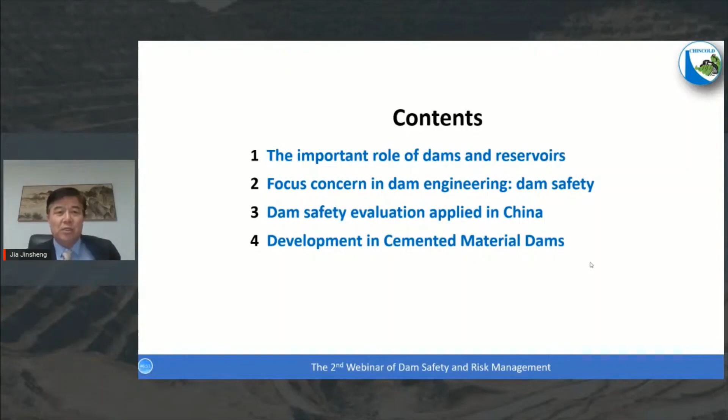So here I would like to go through very quickly 4 topics. One is the important role of dams and reservoirs. There are so many papers, but we still need to remember the important role of dams and reservoirs. Second, we focus on dam safety - what's the main task for the future? Third, I would like to introduce concrete dam safety evaluation in China, what we have done. And last, I would like to introduce the development in cemented material dams.

So this world is developing very quickly. The population growth and the socio-economic development give us very high requirements on water security, food and energy security, and ecological security. So the situation is very challenging for the developing countries.

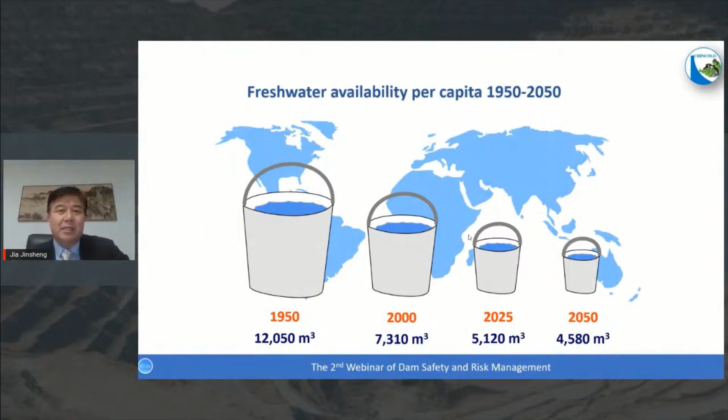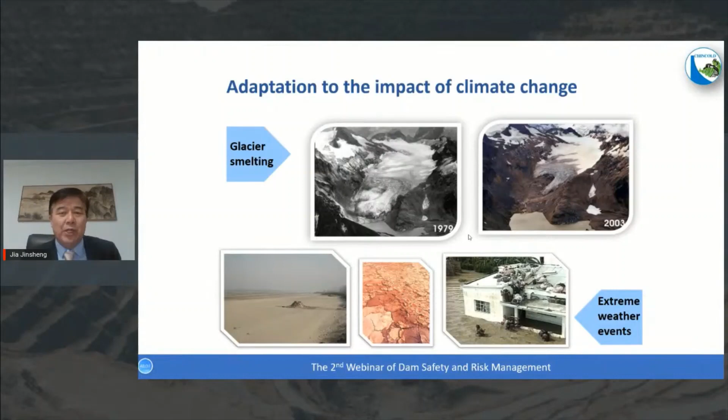So one is the fresh water availability per capita is less and less, especially for some special areas in the world. And also some areas suffering the water stress, hazards, and droughts. So glacier melting and extreme weather events, floods and droughts. All of this, we need more reservoirs, more dams to do the regulation of natural water.

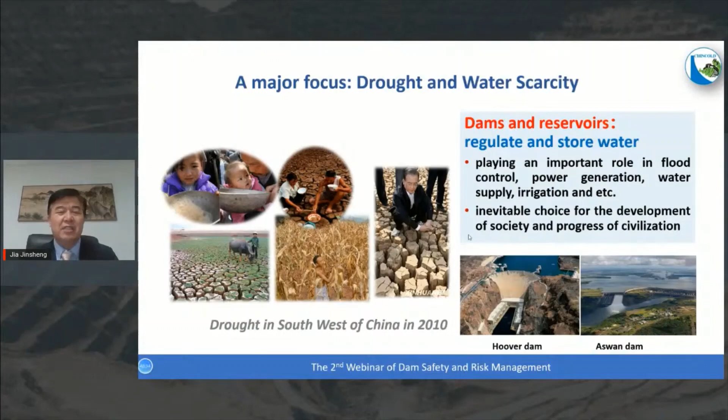So this is some photos in China. So in China, also we suffer droughts and floods. So even though we have the most dams in the world, we have so many dams everywhere, but we still need new dams, new reservoirs in the future.

And also we have made the calculation, with the storage capacity per capita, compared with the HDI - Human Development Index. And also we investigate on the hydropower capacity, making a similar calculation with the relationship to the HDI. So we found that the developing country, for example China, also needs to work very hard to create water storage, to create hydropower development. So that's the basic conclusion.

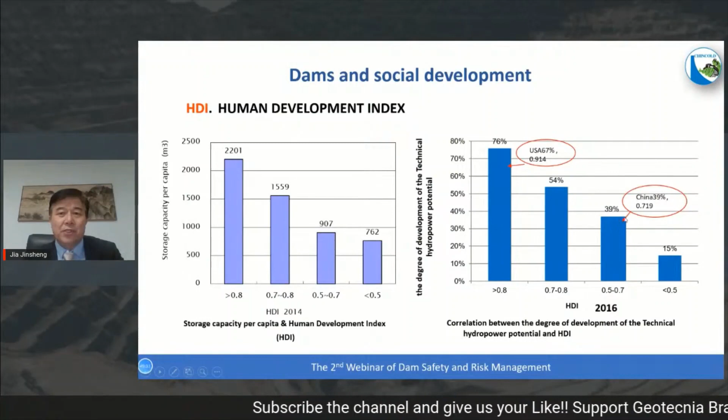For China, we are a developing country, even though we have the largest number in the world of reservoirs and dams. So we issued the World Declaration in the year 2012 for water storage for sustainable development. We just highlight the sustainable development of dams and reservoirs and other water storage facilities. So these are the strategic importance for developed countries and also for developing countries.

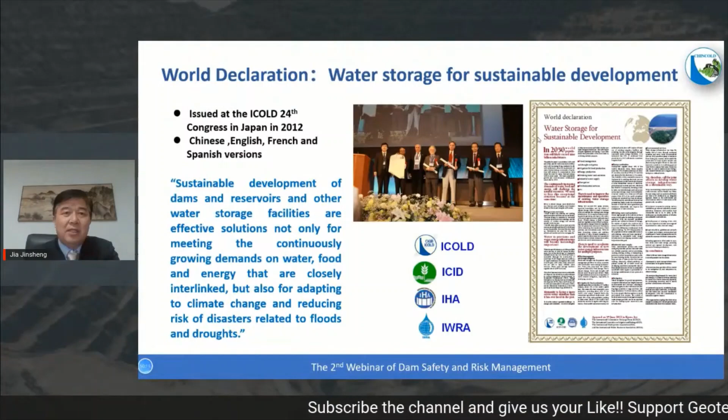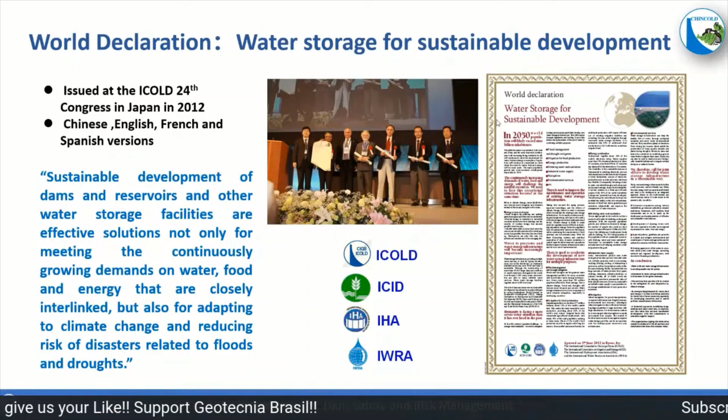So in developing countries, usually we have to fight with disasters, flood disasters, and fight with drought disasters. But if we have reliable and enough water storage facilities, we will welcome the floods, because that means resources. So the basic idea is that we should construct more water storage infrastructure, and also increase the reliability of dam safety.

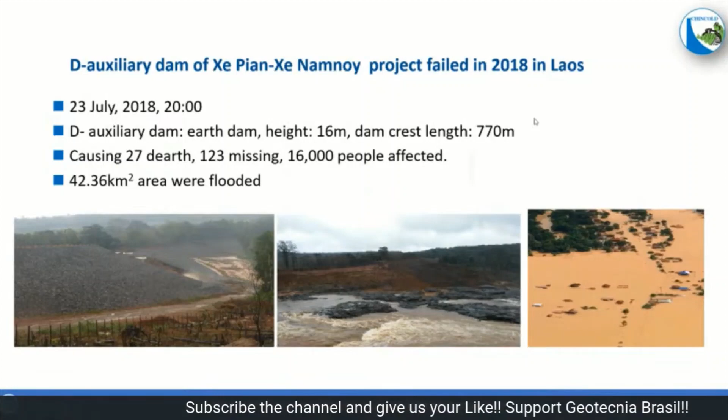And in China, each year we have dam failure cases, and also dike failure cases during the flood season. So each year, the governments pay much more attention to fighting against floods. So that means the water storage facility is not enough and not so reliable. So we should go forward in this direction.

So our president, our esteemed president, Mr. Rogers, has done very good, excellent jobs. He issued the dam safety world declaration. We fully agree on the core parts of these declarations. So we think it's very, very important - better dams for better world. But first, we should have safe dams to guarantee the safety of the people downstream.

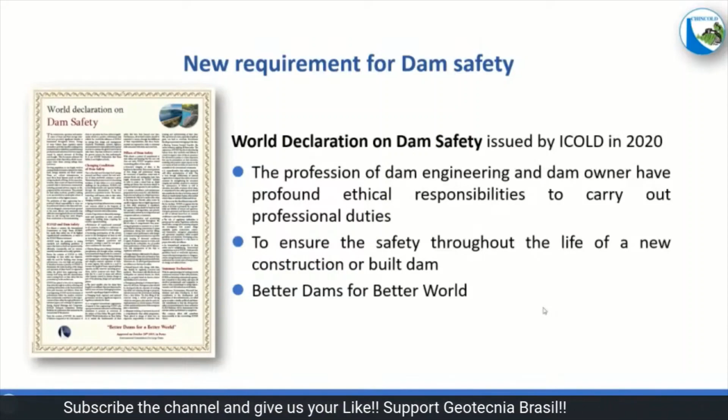So there are so many dam failure cases. In China, we have more than 3,000 dam failure cases. And also in USA, there are about 2,000 dam failure cases. But if we make the comparison between the embankment dams and concrete dams, it's quite different. The dam failing is quite different. So for the people downstream, the concrete dams are much safer.

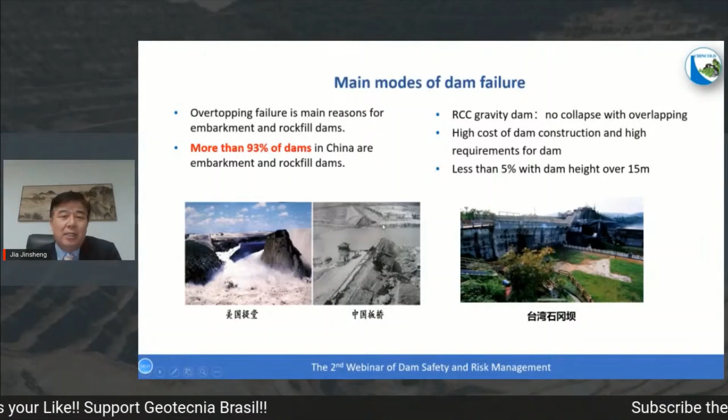So this one is the concrete dams in Taiwan of China, gravity dams, suffering a very high degree earthquake in the year 1999. It is cracked, but the reservoir - there is no very dangerous risk for the downstream because the water flow is very slow. Another case in China is an embankment dam with the dam height 24.5 meters high, but the water reached very high floods only in 2 hours after the dam failure. So thousands of people downstream have died, suffering these big disasters.

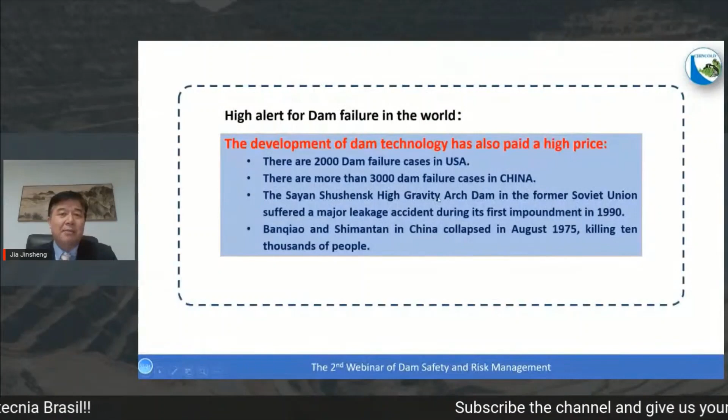Also for very, very high dams, there is an example in the former Soviet Union, the Sayano-Shushenskaya high gravity arch dam. It suffered a major leakage accident during its first impoundment in 1990.

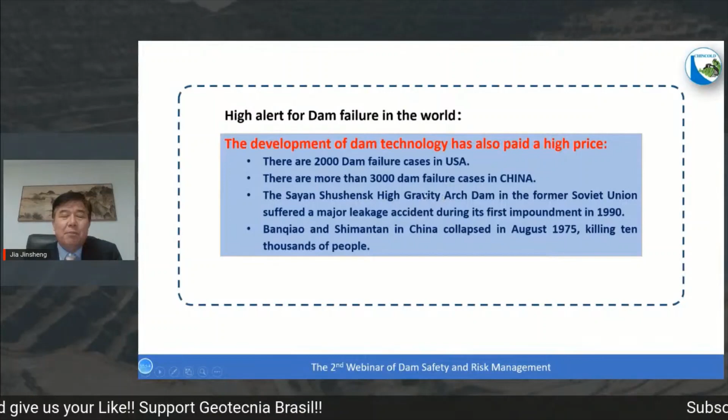There are so many very high dams in operation and under construction. In China, we have more than 22 dams higher than 200 meters. We have to pay much more attention to this kind of dam, because if there is a leakage accident during operation or during the first impoundment, we will suffer very much, because it's very difficult to deal with leakage problems in very deep underwater conditions.

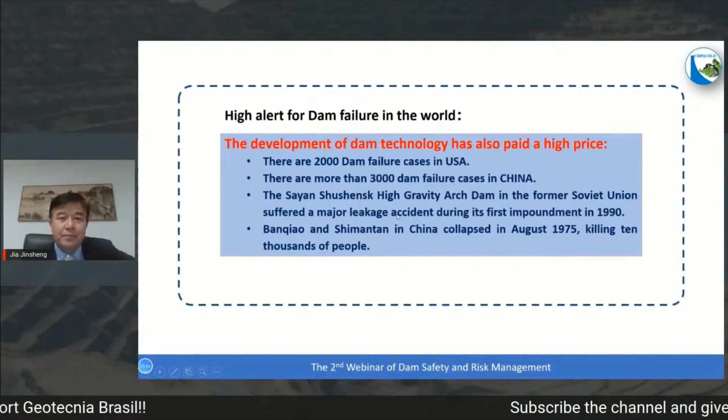So if we check the dam failure cases, we find that the main problem is un-cognition. The challenging factor is uncertainty.

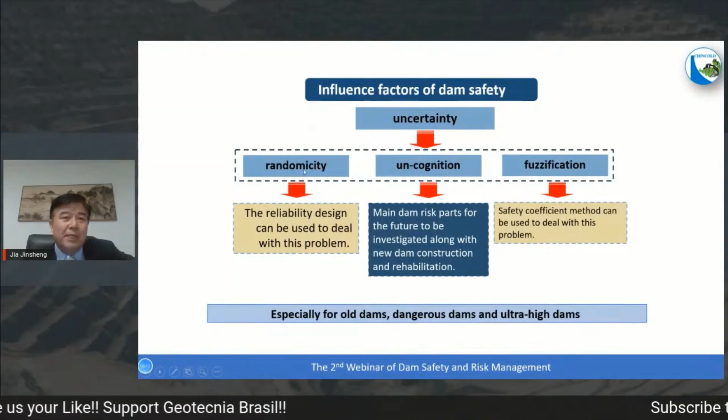Uncertainty has three cases. One is randomicity - reliability design or analysis can be used to deal with these problems - and also fuzzification, meaning a safety coefficient method can be used to deal with this problem.

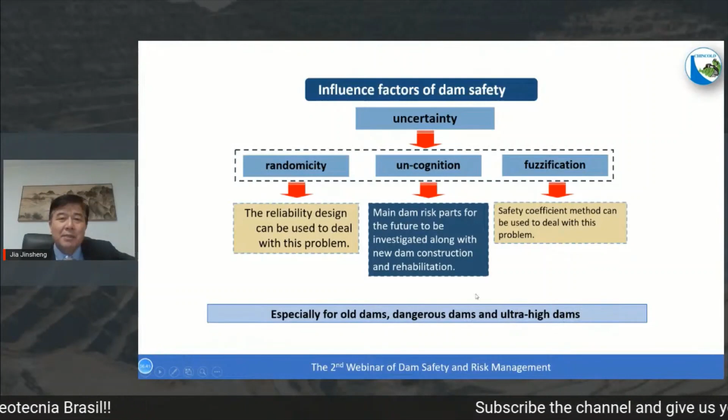But we are facing uncognition issues, uncognition factors. For example, for old dams, for dangerous dams, for ultra-high dams, there are uncognition factors. We have to pay much more attention to these, because this cannot be dealt with according to the experiences we have achieved in the past.

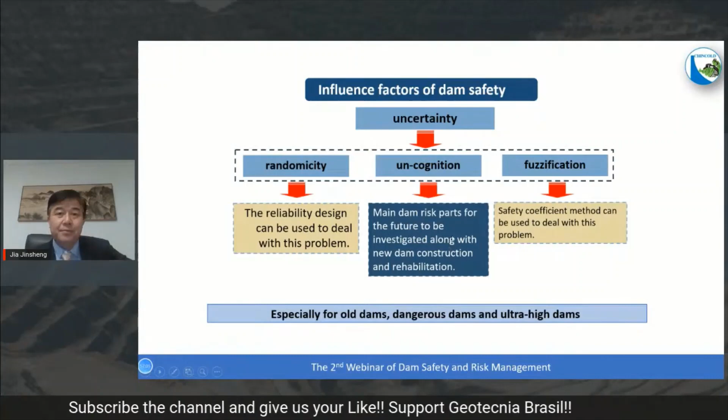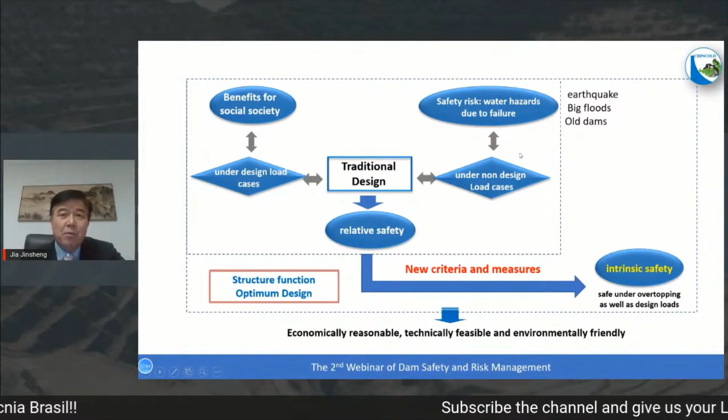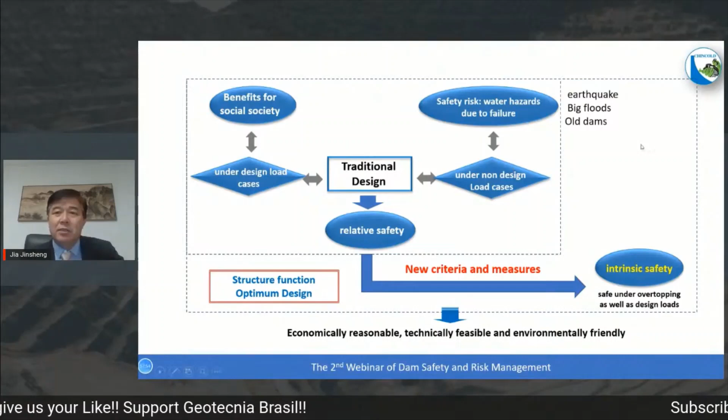Another idea is that for traditional design, we can guarantee dam safety because it's designed under the design loading cases. But for earthquakes, for big floods, for very old dams with problems and incidents, sometimes we have problems - for the dams at Banqiao, for the situation in Taiwan, the Shigang dam. One is earthquake, one is big floods, so overtopping floods have been encountered.

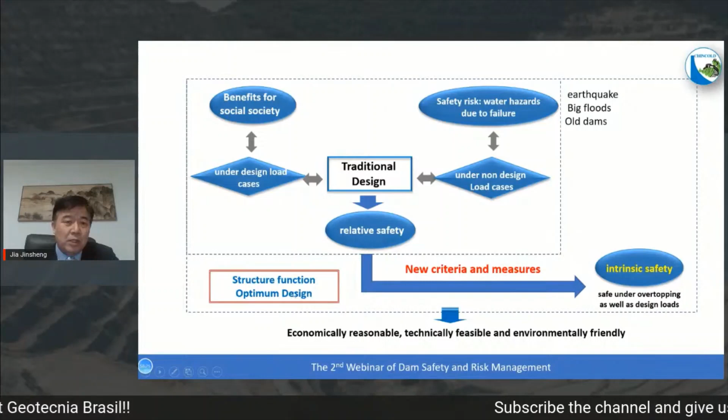So in this case, we have to think about intrinsic safety. That means the dam is safe, or the risk is very low for the people downstream, even in overtopping situations. So we have to work out new structures with function-optimum design methods to achieve an economically reasonable, technically feasible, and environmentally friendly solution.

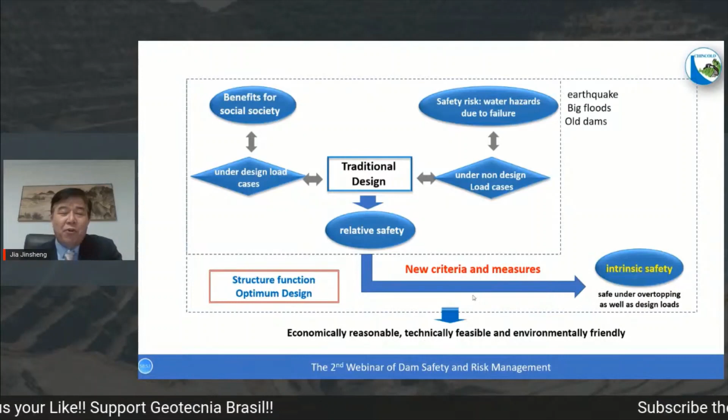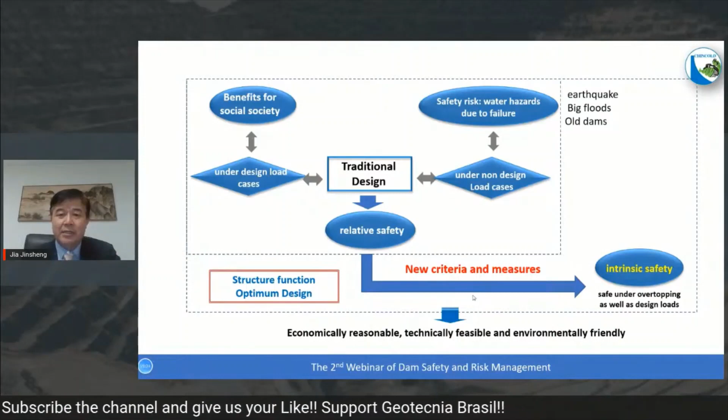So that means we have to work on facing the risks - moving from performance-based design to risk-based design, or risk-informed design. We have to optimize the material, optimize the structure, optimize the construction procedure to work together jointly to achieve intrinsic safety, to achieve a better design so that at any time the people downstream are in a safe situation.

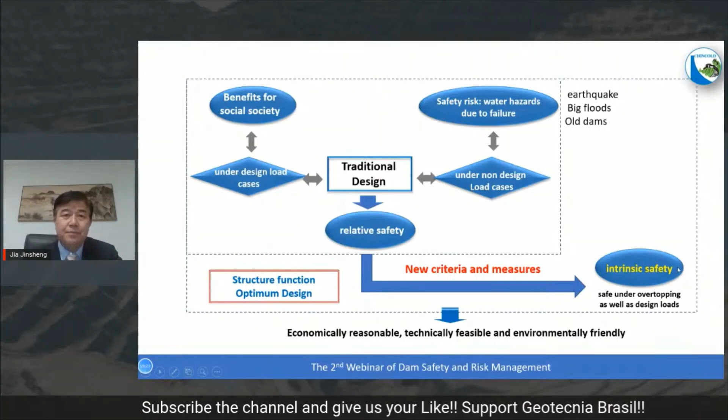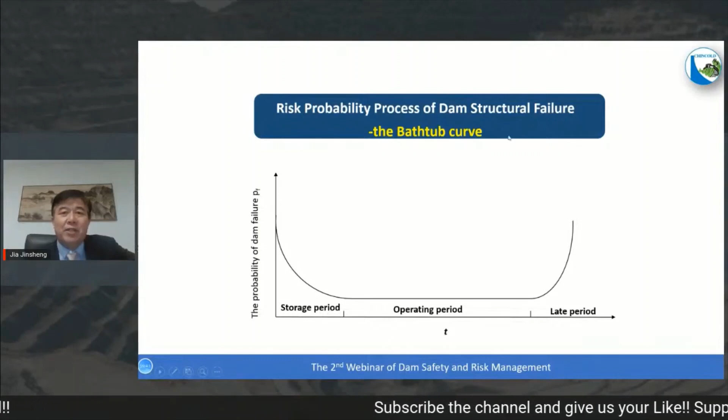Another point is that in the risk probability process of dam structural failure, if we make the calculation of dam failure, it very accurately follows this curve. That means in the storage period there are problems, and in the late period there are problems. So for these periods we have to pay much more attention.

In other words, most of the dams now are going into the late periods, so we have to be careful to make the calculation and the evaluation for dam safety.

So we have an example for concrete dam safety evaluation that we want to share for your reference.

This dam is the Fengman dam. It was built starting in 1937, impounded in 1944, and finished in 1953. The dam height is 91.7 meters. It is a concrete gravity dam, but this dam has had a lot of problems from the very beginning of construction.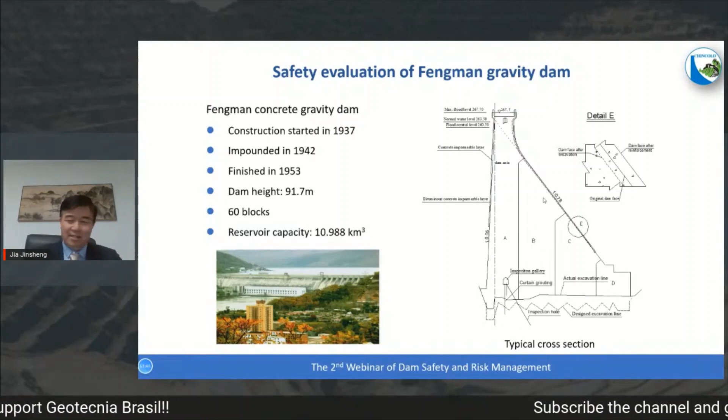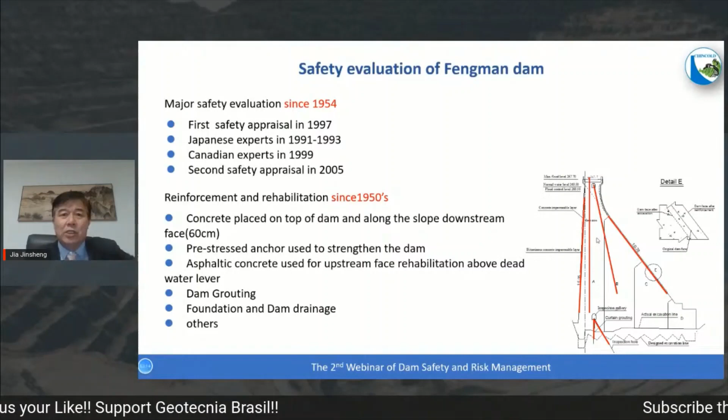So we work on an analysis system to do the safety evaluation. We calculate with the finite element methods. We simulate from 1937, from the first block's construction, and simulate all of the procedure, the material, the structure, and calculate the stress, the deformation, the displacement, with the monitoring results. We adjust the parameters of the material, and then we can get the calculation. The results are similar to the monitoring results. So in this case, we can overload the water pressure and get the coefficients of safety.

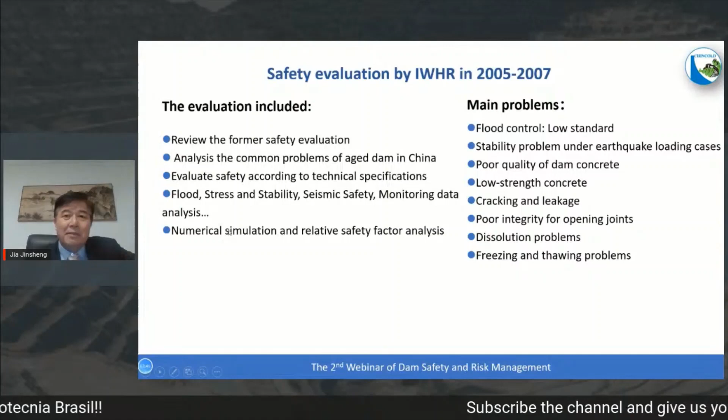So after the analysis, we achieved the results, and we got the results that the dam is not safe. The safety coefficient is too low compared with the new concrete dams. So we worked out 3 solutions.

One is reinforce and rehabilitate with an impounded reservoir. Upstream, we do seepage control by geomembrane or concrete impervious wall, dam grouting, heightening and thickening the dam body by 4 to 6 meters. Solution 2 is reinforce and rehabilitate after emptying the reservoir. Solution 3 is building a new RCC dam and using the old one as a cofferdam.

So there are 3 solutions, but the investment is quite different. For solution 1, only 1 billion RMB is necessary. For solution 2, only 3 billion investment is needed. For solution 3, we need 10 billion.

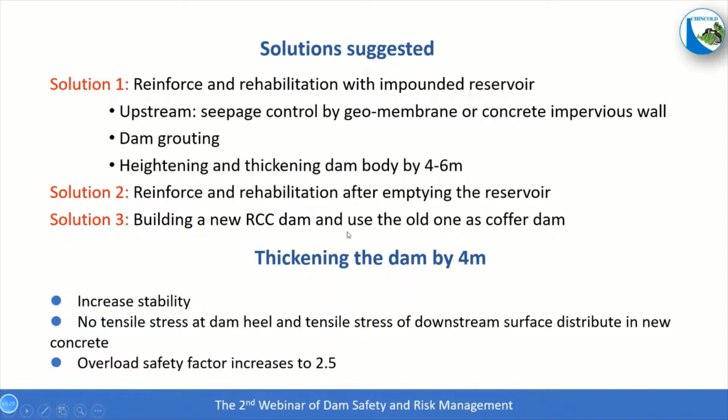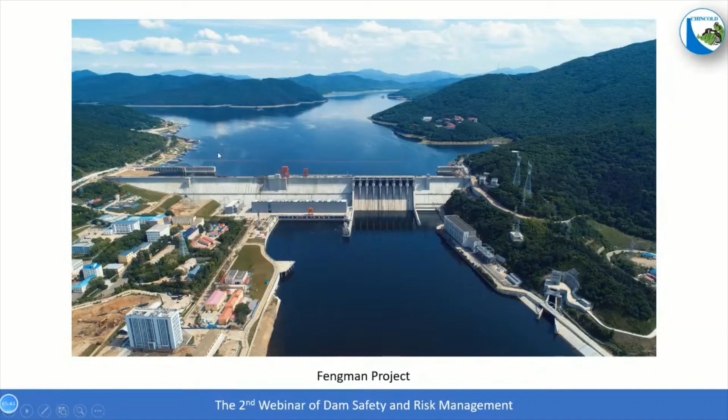So finally, after so many analyses, solution 3 is recommended and adopted. So this Fengman Dam has been removed, and we have built the new RCC dam. Here is the dam after the new construction. Here is the old dam, with only the buttress existing, and the old dam has been removed. Here is the new RCC dam.

So this is one real analysis of the old dams in China.

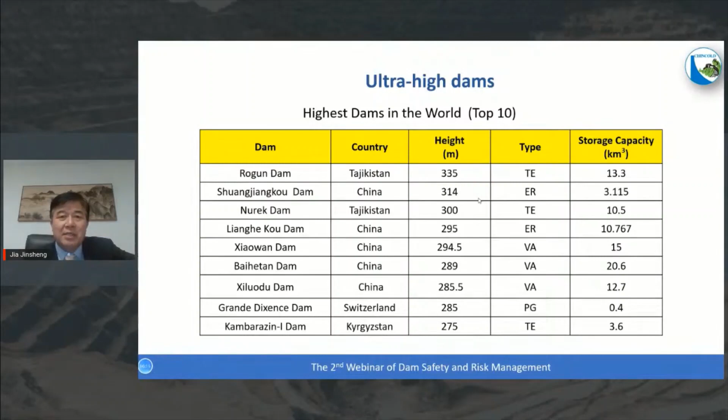And for the ultra-high dams, we also made comparison work between different types of dams to get the safety coefficient to guarantee the safety.

So one issue is that due to some uncertain causes, cracks occur in super high concrete gravity dams and arch dams. Gravity dams and arch dams, if they are higher than 250 meters, we have to very carefully check the problems. It's quite different. After so many project investigations, we found that because of the high static pressure on the cracks, hydraulic fracturing may occur.

It's urgent to properly model the propagation of cracks under high static pressure and put forward practical countermeasures. That's the one problem investigated, led by me, focused on very high concrete dams.

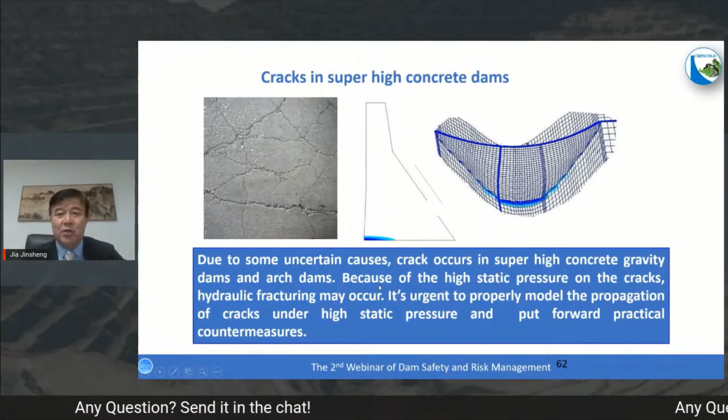In China, we follow the non-tensile design criterion of concrete gravity dams. After comparing with the USA and Switzerland, we think it is not so safe. So we worked out the hydraulic fracturing design criterion to guarantee the safety of gravity dams.

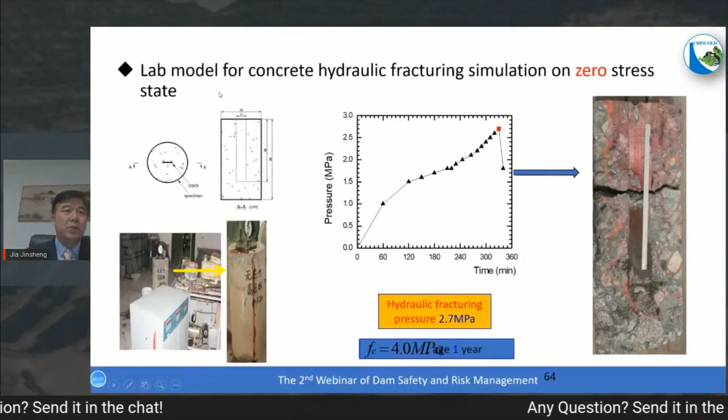To achieve these goals, we have done a lot of lab model tests for concrete hydraulic fracturing simulation. One test is on zero stress state. We got the pressure for hydraulic fracturing is 2.7 megapascals.

That means if the tensile stress is too small, hydraulic fracturing is easy to happen.

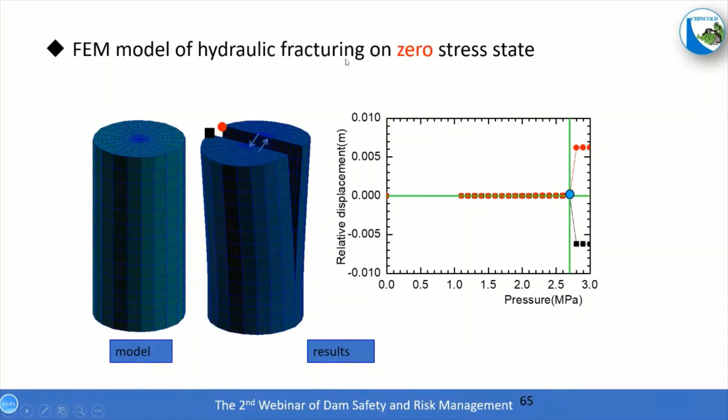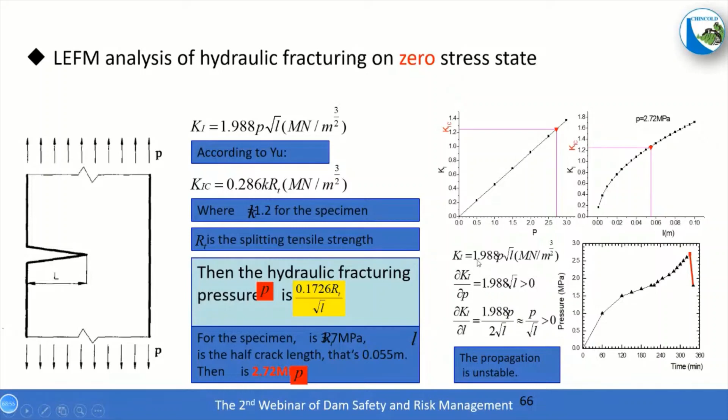And also we have done the FEM model for hydraulic fracturing on structures and dams, and we worked out the formula to evaluate the situation of whether or not it will happen. So this is the model, this is the FEM model, and here is the hydraulic fracturing analysis results.

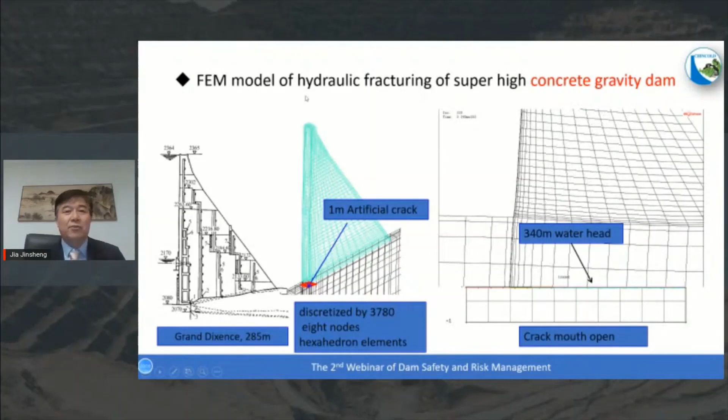We also did the analysis for the Grand Dixence dam. This dam was designed not according to the non-tensile stress principle. It adopted a similar way with double shaft, like in USBR, for the dam section design. That means the dam section is much larger compared with a similar height dam in China. But after investigation, we found that in some cases hydraulic fracturing may occur also. So that's not a good principle for the design. We have to investigate hydraulic fracturing.

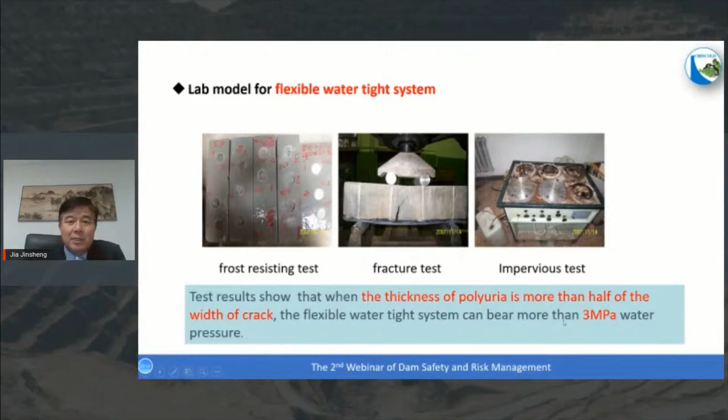For the arch dam with the very extra high height, we have checked the hydraulic fracturing problems based on the laboratory test results. Here is the result, the test and the simulation. We also worked out a new way to resist the water fracturing, to bear more than 3 megapascal water pressure, so that the face can have cracks, but the water cannot go into the concrete.

Another way to improve dam safety is the flexible watertight system in the upstream lower part of the dam face. We have worked on this system. Within this system, the water flow should be much less compared with the normal design. Here is the different design.

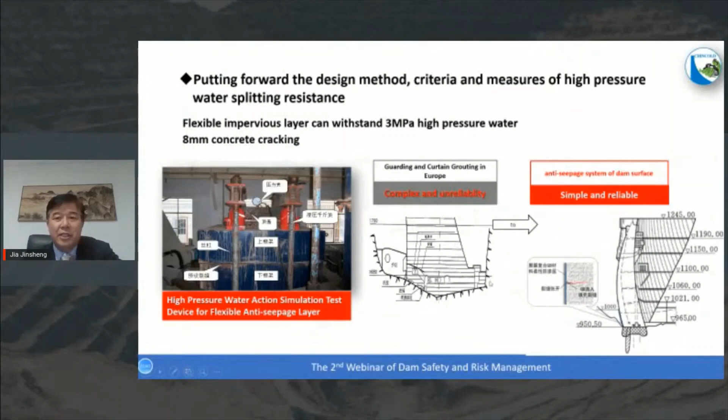This one is the Kölnbrein dam in Austria. So when there is a crack, the water pressure will penetrate the gallery, and the water will come through. But with the new design of Chinese dams, even with cracks, there is no penetration of the water pressure.

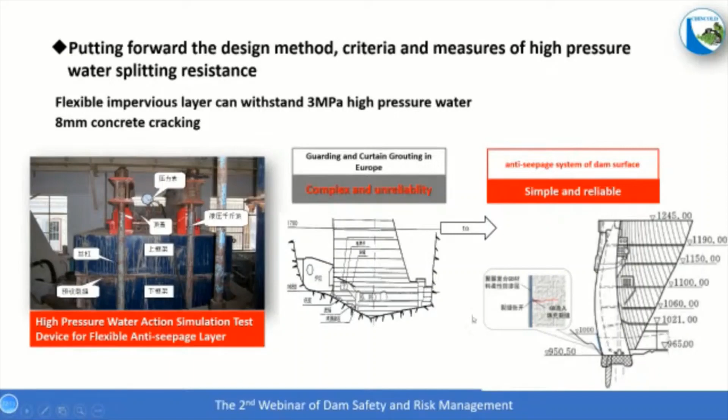Here is the example of the Xiaowan dam, with a height of 294.5 meters, using this system to guarantee the safety of the rock in these parts and to guarantee the safety of these parts of the dam against water fracture problems. This dam has been operated for several years with very low seepage.

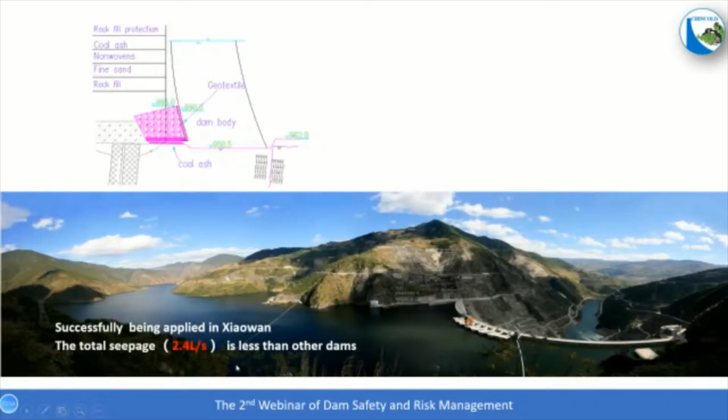So the last part is the development of cemented material dams. Why propose cemented material dams? Embankment materials and concrete materials are the main materials for dam construction, and embankment materials are quite different from concrete materials. So the basic question is: is it possible to develop a new material between the two kinds for dam construction? Is it possible to further develop the dam design theory based on the characteristics of these new materials? This is the basic question, and this is why we proposed this new type of dam.

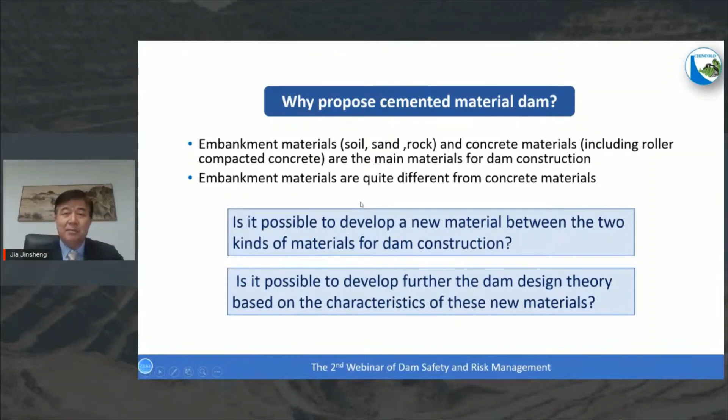Based on the development of RCC, hard-fill dams in France, and the CSG dam in Japan - but they follow the principle of RCC - I think we can, based on new materials and new principles, develop the cemented material dam. This allows an economic way to build a safe dam against overtopping, and it can be built on non-rock foundation. Usually RCC dams and concrete dams cannot be built on non-rock foundation.

So at this moment, when we develop CMD, we will try to build it on non-rock foundation - this is one difference. Another point is that the cost of CMD should be much less compared with RCC, compared with hard-fill dams, compared with CSG. This is the basic goal of this new type of material and new type of dam.

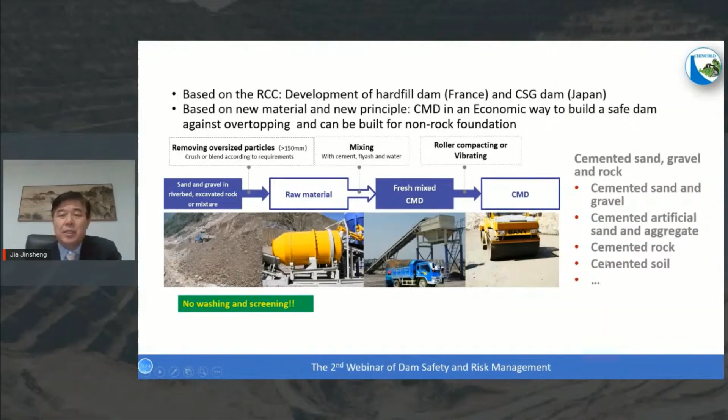We can build them with cemented sand, gravel, and rock. We can build with cemented artificial sand and aggregate, cemented rock, cemented soil - all of these materials can be used to build the new type of dams. The shape of this kind of dam is similar to hard-fill dams, but the material, the construction procedure, and the design principle are quite different.

So we have to develop the CMD counter structure. We can use CVC for the face, we can use grout enriched vibrated CMD with good performance. Anyway, the CMD can be controlled easily, and the stability can be guaranteed very easily, even on non-rock foundation.

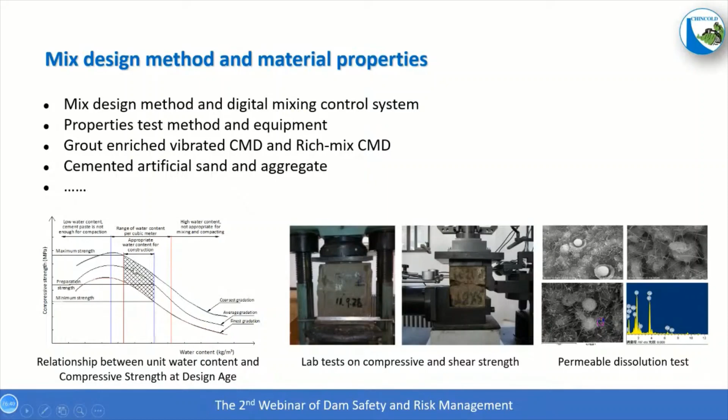So why can we construct the CMD? One basic point is that we can work out the minimum strength of the material. When we find the material parts, we can find the lowest points, and based on the lowest points, we can determine the dam section - that means the dam is safe. With the digital system, we can optimize these parts to decrease the cost of construction.

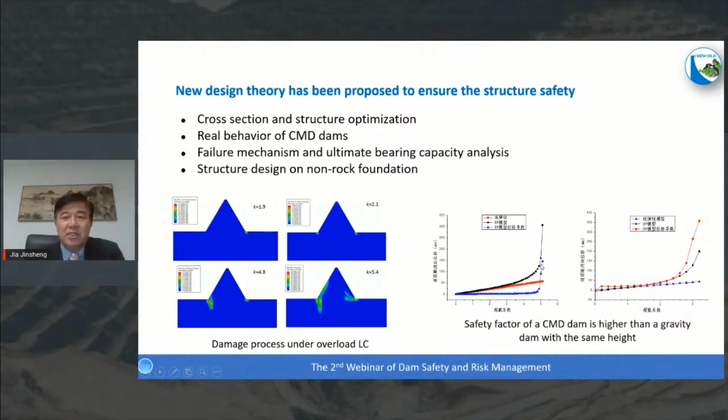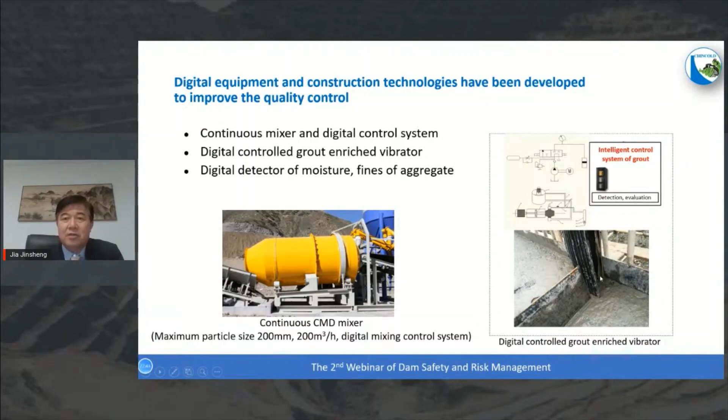Digital equipment and construction technology have been developed to improve quality control. Here is the mixer, here is the surface of the new type of dam, and here is the situation for construction, for compacting and mixing, controlled digitally. The mixing and roller compacting can be digitally controlled, so we can work out an expert system to make it intelligent.

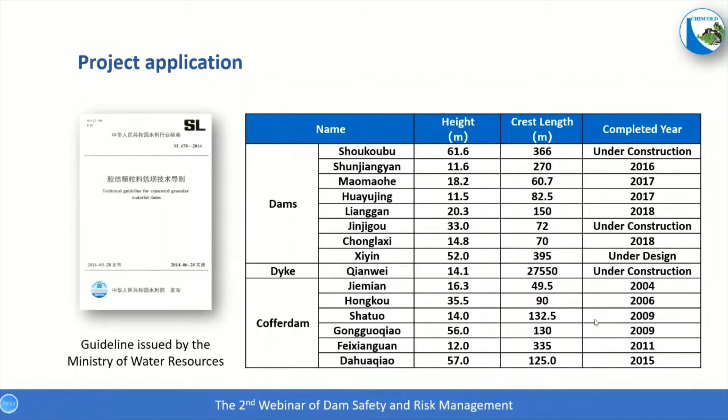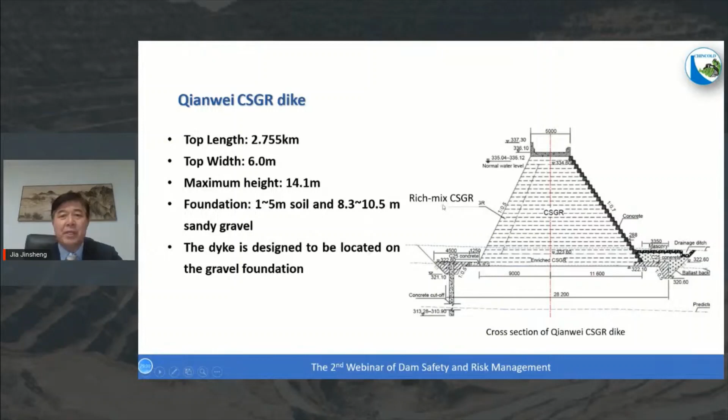Here is the dyke, also built with cemented material dam. In this case, it can be overtopped, and it can be safe during the overtopping.

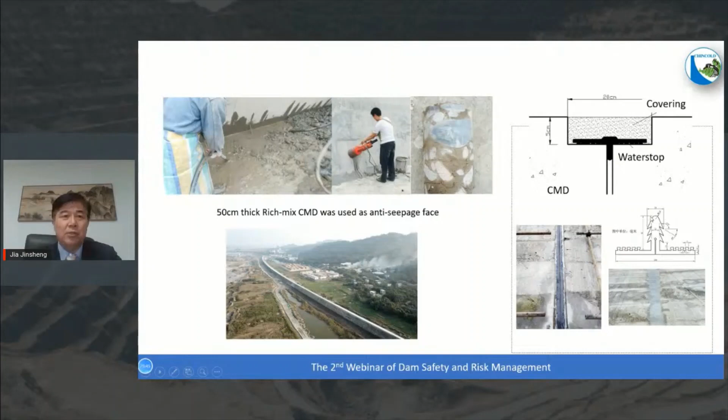So here is the dyke, the construction procedure, and a new design waterstop for this new type of dyke. This dyke is built with cemented material, similar to a CFRD, but overtopping happened. After overtopping it has been filled, and it is still safe with no problems, even on non-rock foundation.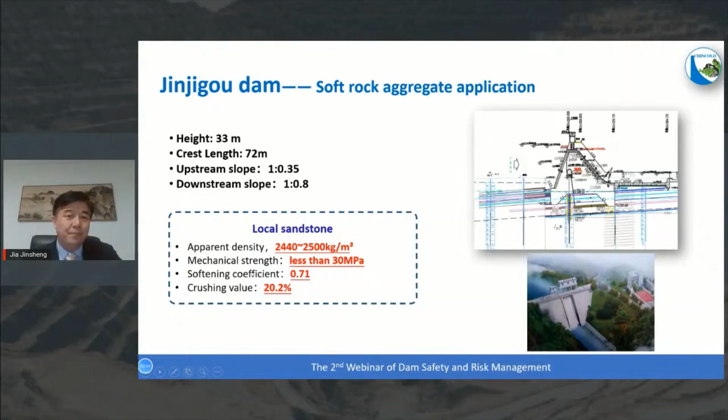To use soft rock, we have done a lot of investigation testing with different mix designs and different materials used, and we obtained different strengths. After structural analysis, we can guarantee it is safe.

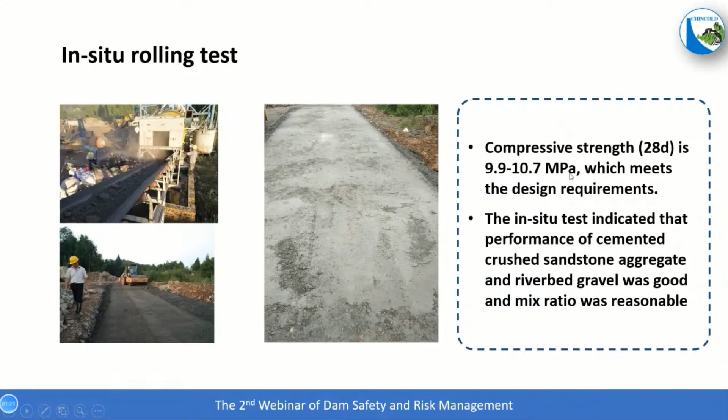Here is the situation at the dam site. We can still achieve compressive strength of 9.9 to 10.7 megapascals, which is big enough for the design. So soft rock can be used.

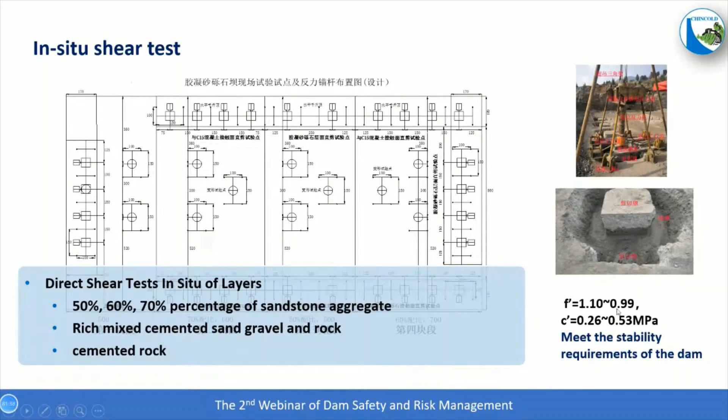Here are the tests for shear analysis and stability analysis, the parameters at the dam site tested in different ways, even for large rock with cemented rock, sand, gravel, and rock mixed together. After in situ testing, the safety can be guaranteed. So here's the situation.

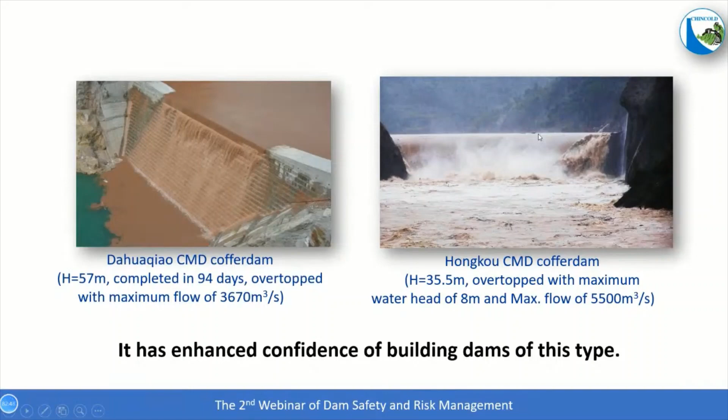So CMD dams can be used against overtopping failure, with quick construction, in an economic and environmentally friendly way. Usually 10% or 20% of the cost can be saved compared with RCC, the traditional way. So for many dam sites, we can build this type of dam because it can be built on non-rock foundation.

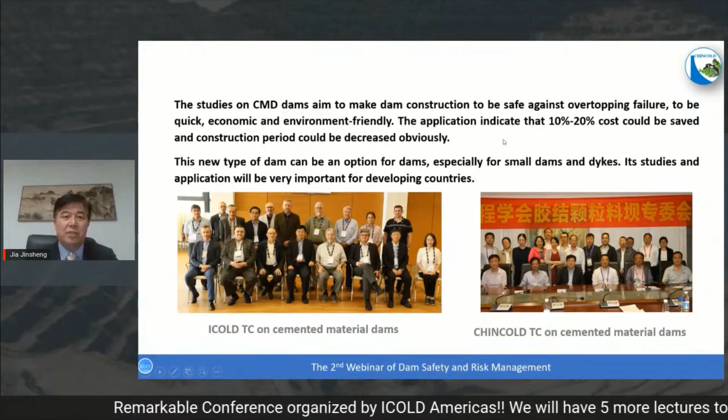So, the ICOLD technical committee on cemented material dams - we need more dam engineers to join. And also in China, we work on this technical committee.

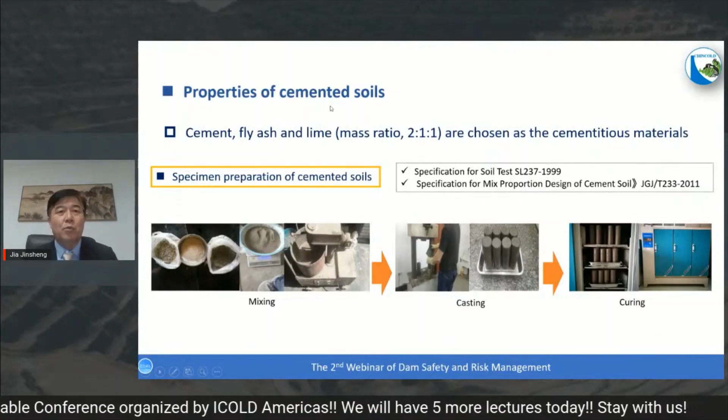We also try our best to work together with French engineers on cemented soil dams. A lot of tests have been made.

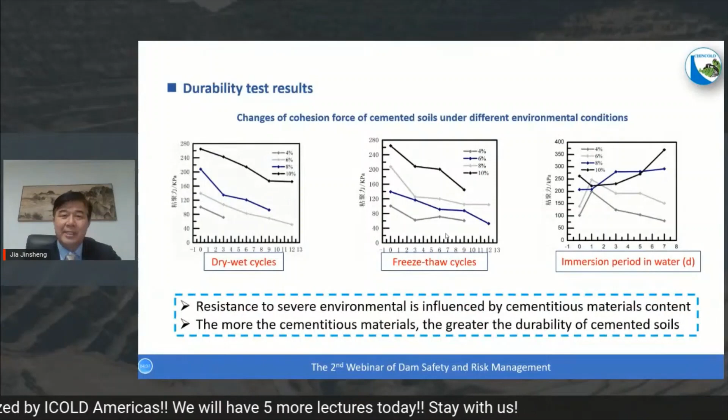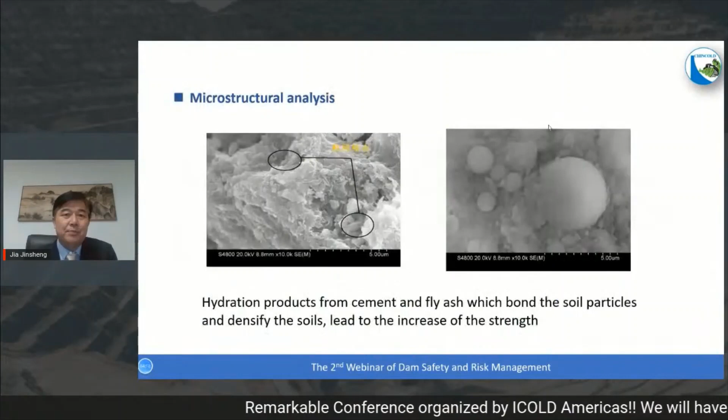The main business is to build the dyke with cemented soil and to investigate its safety, whether or not it is reliable to use this material. So all of the analysis is to test the reliability.

So here is the overflow test for the cemented soil dyke. We worked with a model to do the test. So here's the situation.

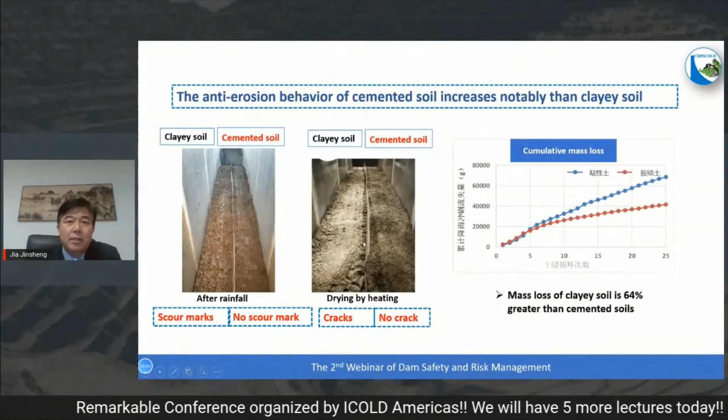So after 44 hours, there was no breaching. So for the cemented soil dike, it is really safe against overtopping. So it's quite nice compared with the traditional embankment dams.

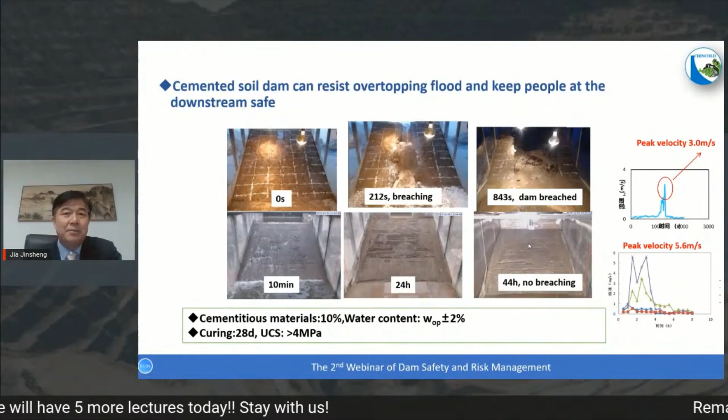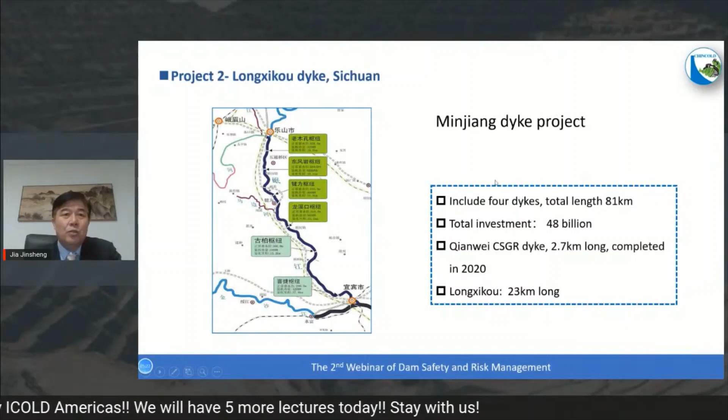So here is the dam site situation. And also at this moment, we are working on another dike project to try to use cemented soil.

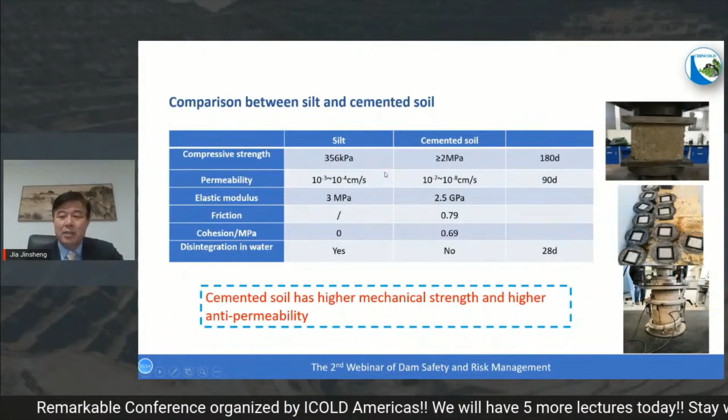At this moment, we are on the way to doing laboratory tests, and the design hasn't been determined yet. This year or next year, we want to finish the dike construction. Thank you very much.